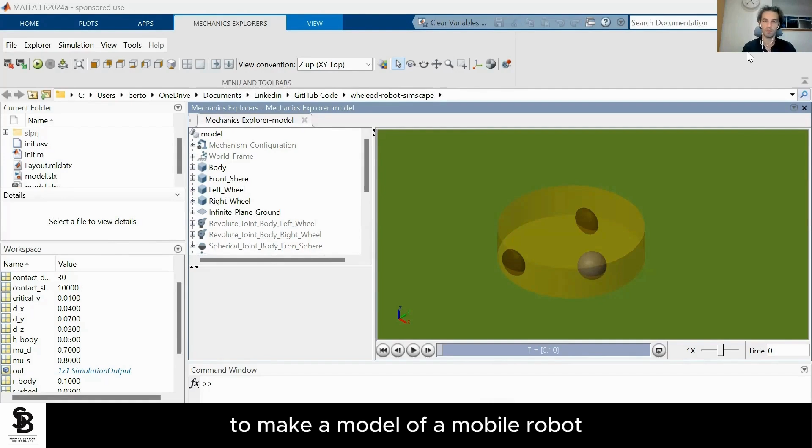I spent a few hours studying Simscape and trying to make a model of a mobile robot because I think it can be a very good and interesting platform to play around with control strategies and show some interesting things.

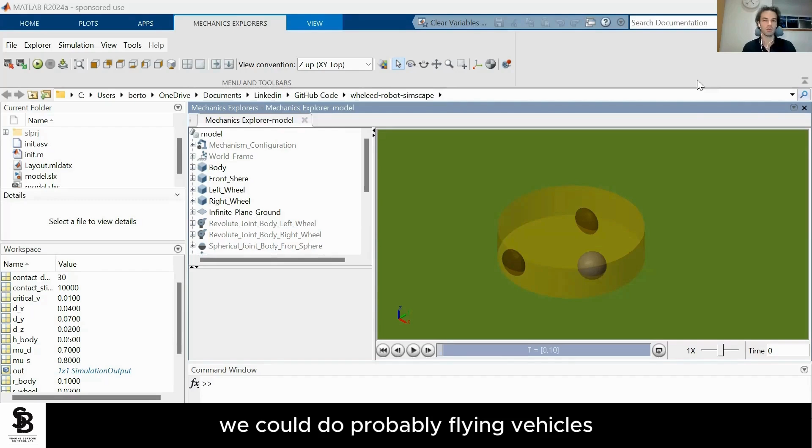And I'd really like your feedback about this. If you think this could be useful, if you think we could do something interesting with that. We could do other types of vehicles. We could probably do flying vehicles, maybe vehicles on water, underwater. I still need to learn, but I think it's interesting.

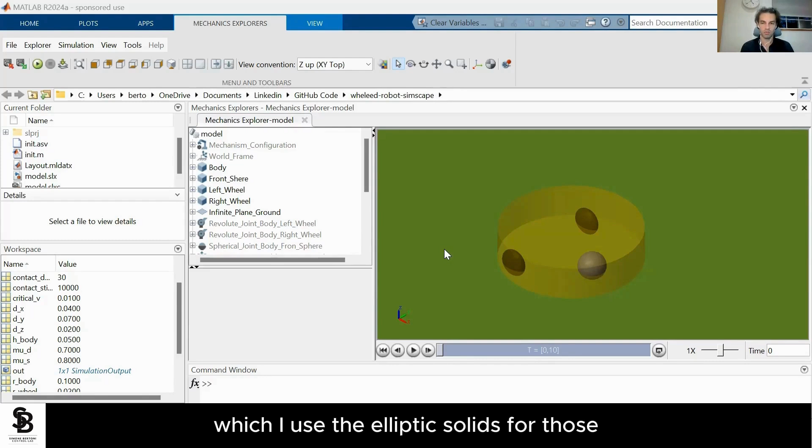So I'm starting here from the result. So you can see this is the robot, and these two are the wheels, which I used elliptic solids for, and they are actuated, so they can only spin around the horizontal axis here, like a virtual axle.

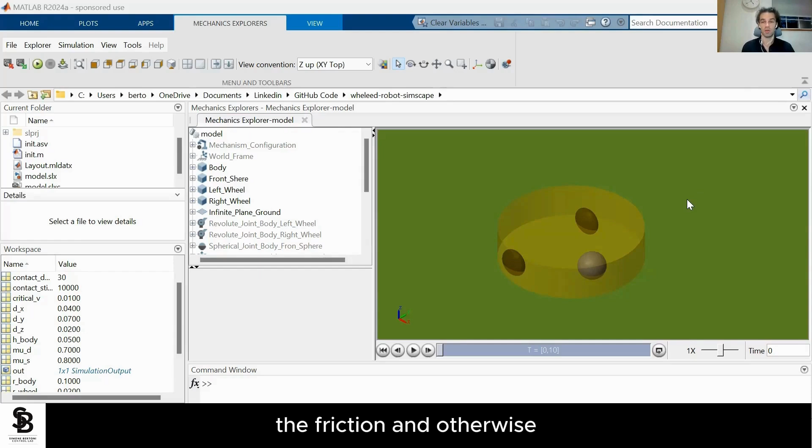And then I have a sphere on the front, which is not actuated, it's free to revolve around a spherical joint, and it's there basically to reduce the friction, otherwise we would be touching the ground with the body of the robot, which we don't want. And we can see a bit more here on what the result is. So this should be good.

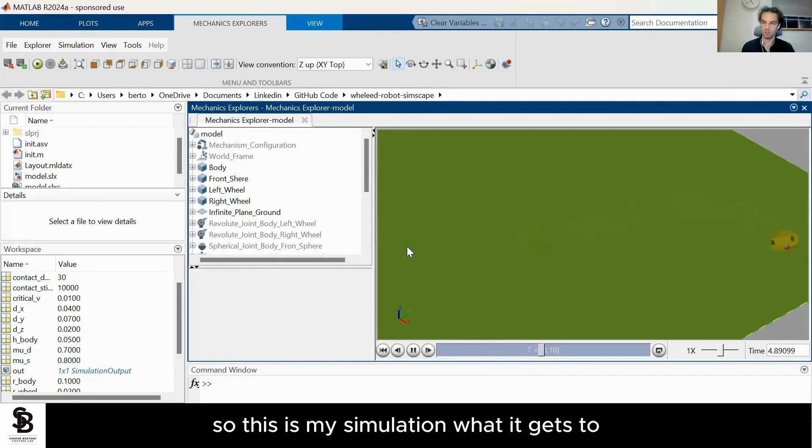Let's play the video. So this is my simulation, what it gets to. And I have no control for now here, okay? So this is all torque generated for the wheels simply by generating the torques as a profile, just to see if the model does what it's supposed to do.

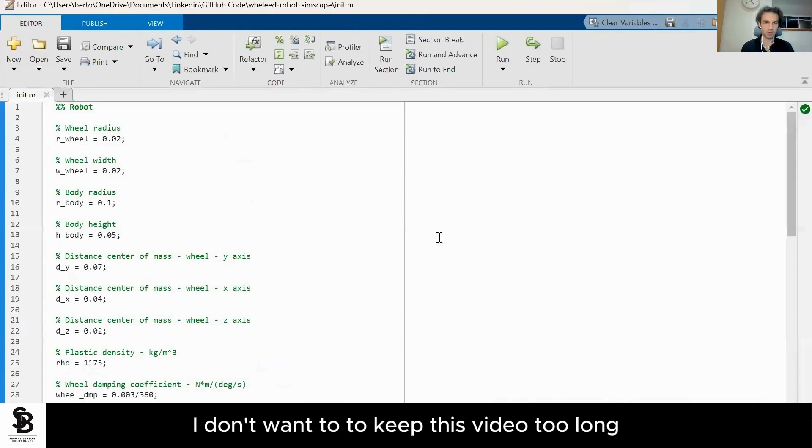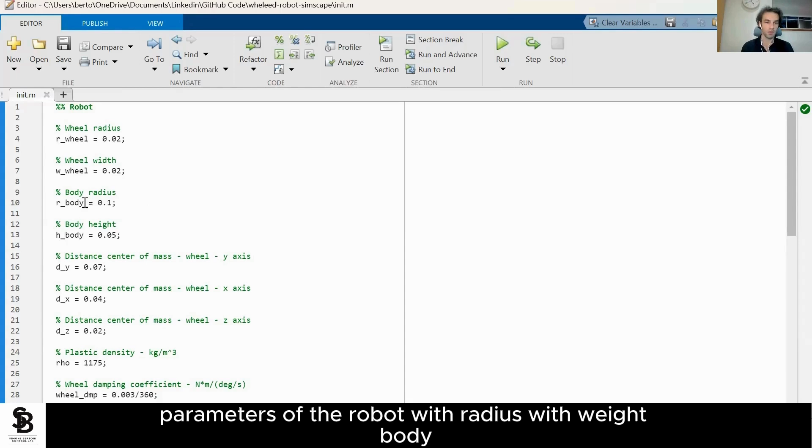Okay, let's see some configuration. I don't want to keep this video too long, so I'll try to do various videos going more into the detail later. But these are a few configuration parameters of the robot: wheel radius, wheel width, body. It's a circular robot, 10 centimeters radius. I was kind of thinking about my Hoover robot really when I put together the parameters. Okay, so there's nothing difficult there.

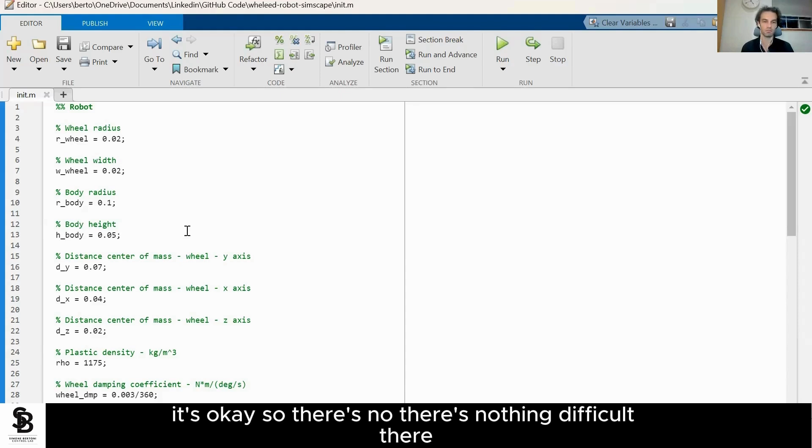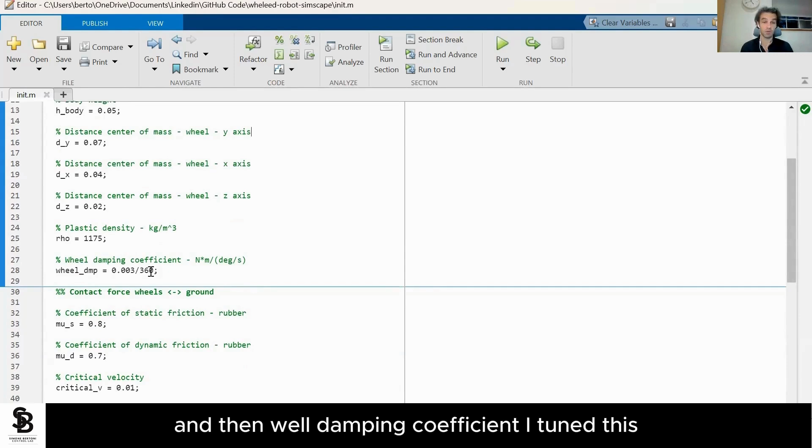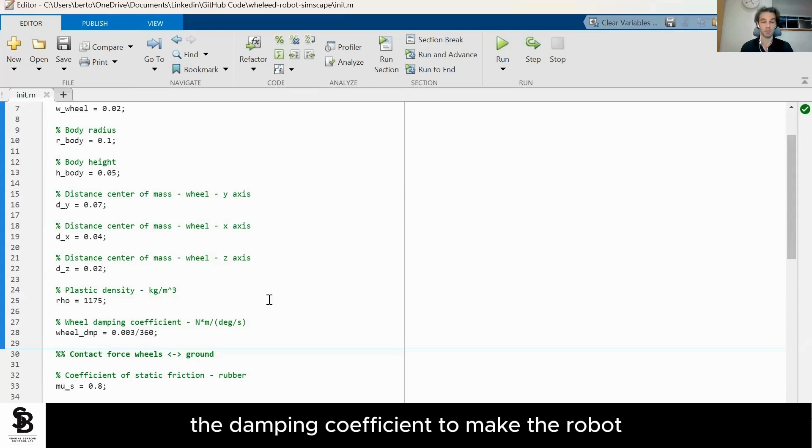Then plastic density, again, I thought it was reasonable. And then wheel damping coefficient, I tuned these. Basically, I looked at a few DC motors that are used in these cases. I picked the maximum torque that they can deliver, and then I used the damping coefficient to make the robot not exceed a reasonable speed, like half a meter per second or a meter per second, something around that. Then we have the contact force with the ground.

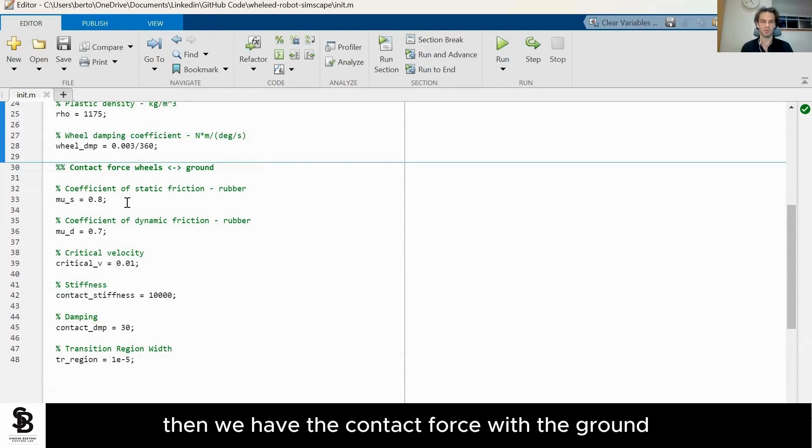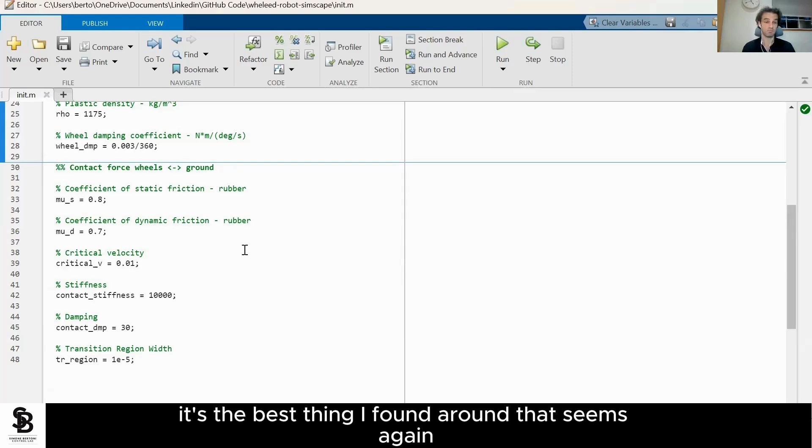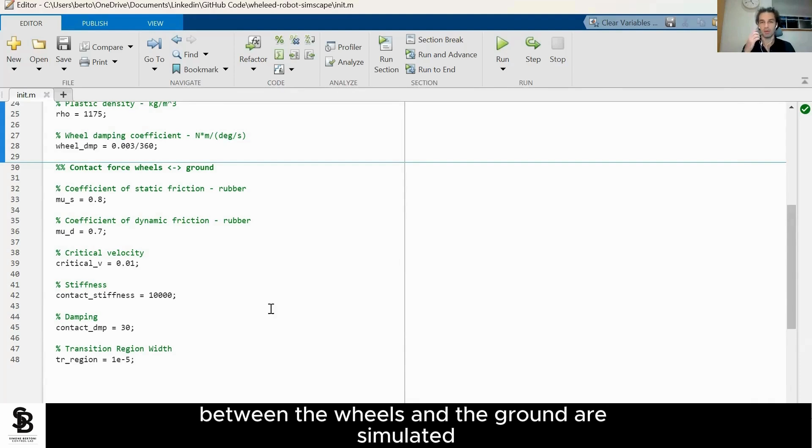So the friction, static friction and dynamic friction, I took rubber on a concrete platform. It's the best thing I found around. That seems reasonable for now. These parameters around the contact force and how the contact between the wheels and the ground is simulated are still a bit of a mystery, to be honest, for me. So I looked at other examples from MathWorks, and I hope they're good enough. They seem to replicate the behavior well.

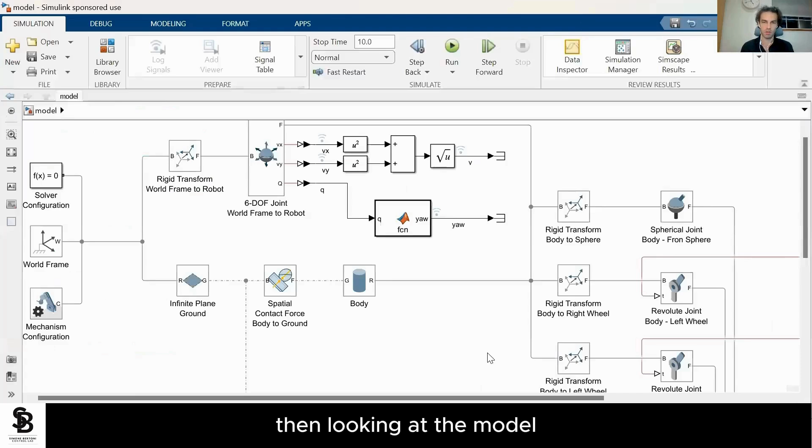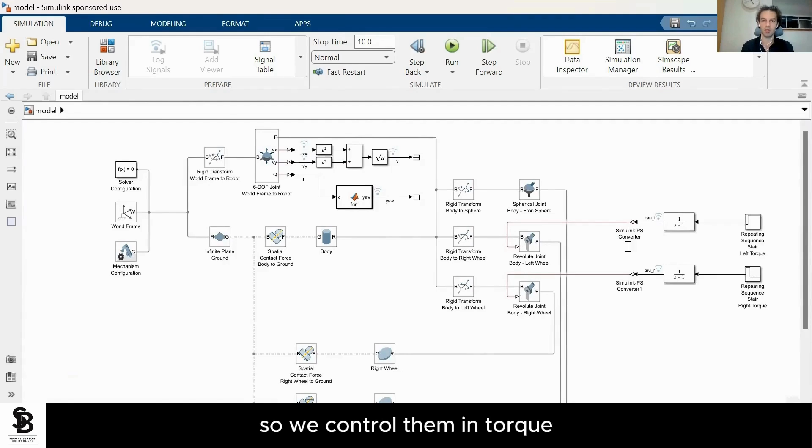Then looking at the model, I'm not going to explain the model too much because I want to do another video. But basically, the wheels are ideal. So we control them in torque, which obviously isn't right, but it's an approximation for now. Maybe going forward, we will use our DC motor model that I've done in Simscape as well. We'll see.

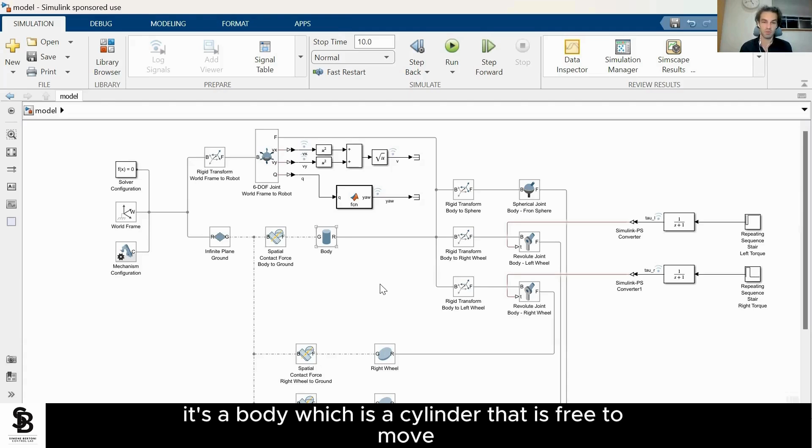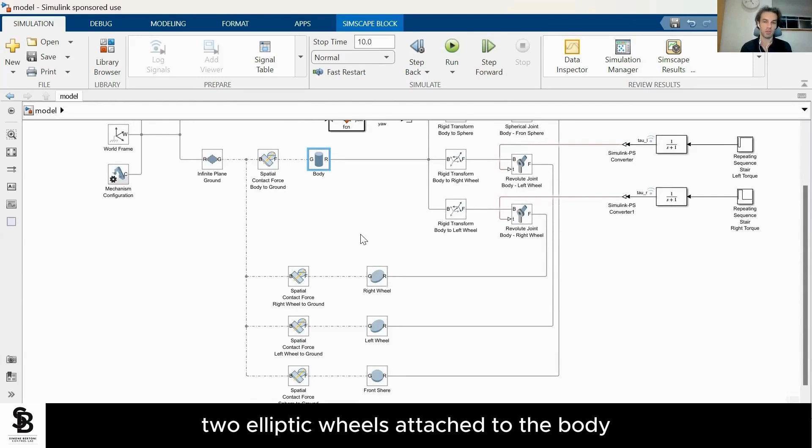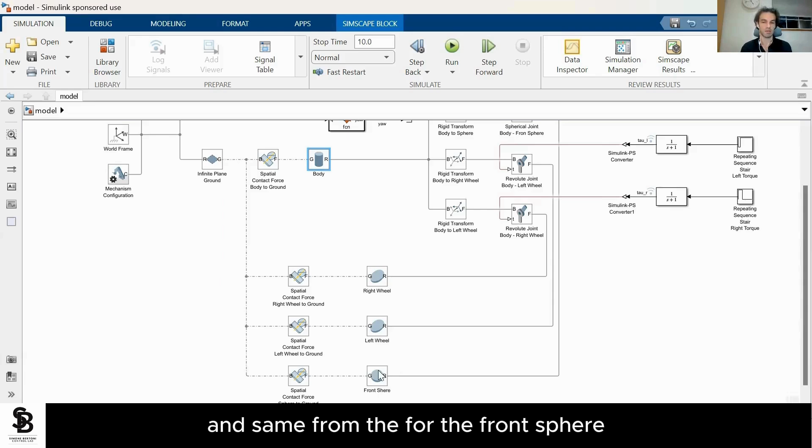And then what we have is essentially a body, which is a cylinder that is free to move with respect to the world frame. And then there are these two elliptic wheels attached to the body, which can only revolve around the horizontal axis, and they're slightly translated to place them where I think it's reasonable. And same for the front sphere.

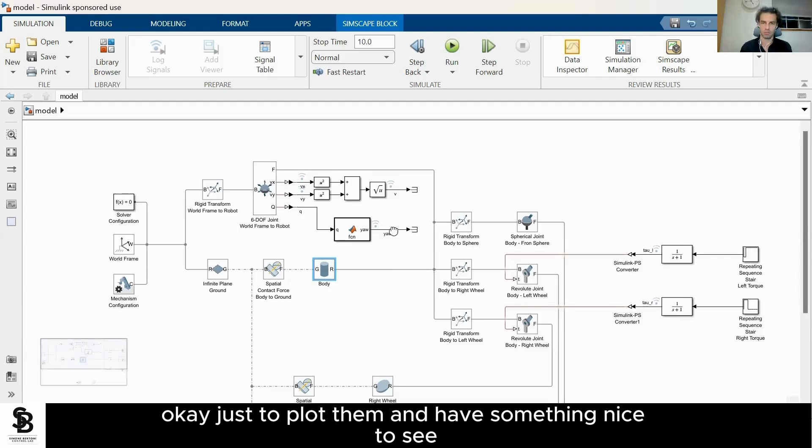And then what do we have? The joint of the robot. I've played around with it to find the speed on the ground and the heading, basically. Okay, just to plot them and have something nice to see. So let's look at the plot.

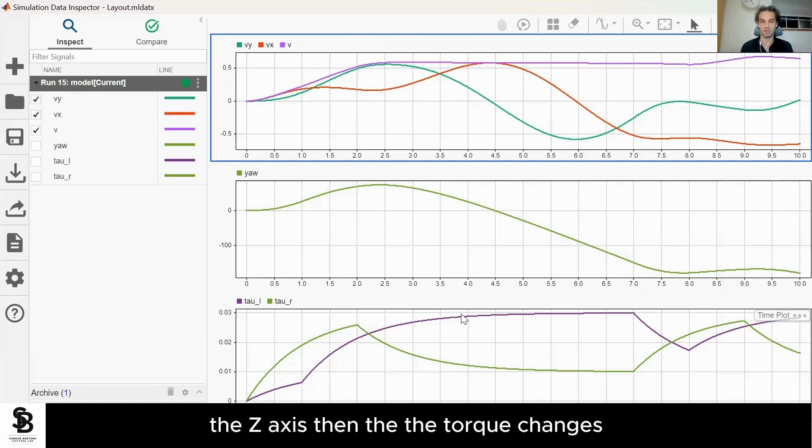This is the plot. If you remember, I'm giving more torque on the right first, so we're going left, which is positive towards the Z axis. Then the torque changes, so we're giving more torque on the left, and we go the other direction, right? So we go towards 90 degrees, more or less, and then we go towards minus 180.

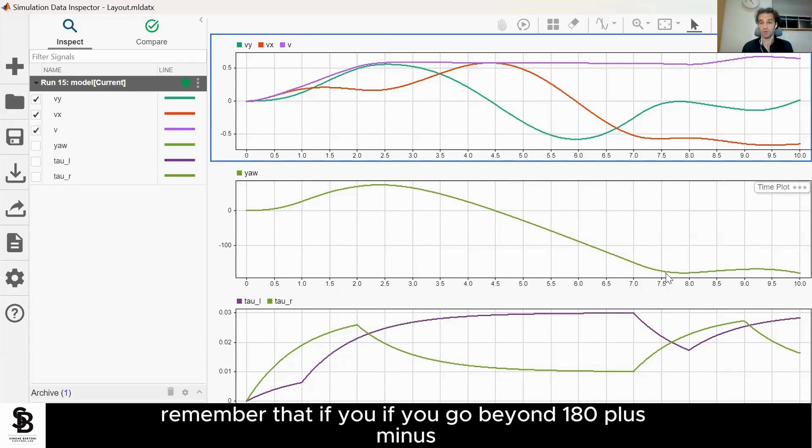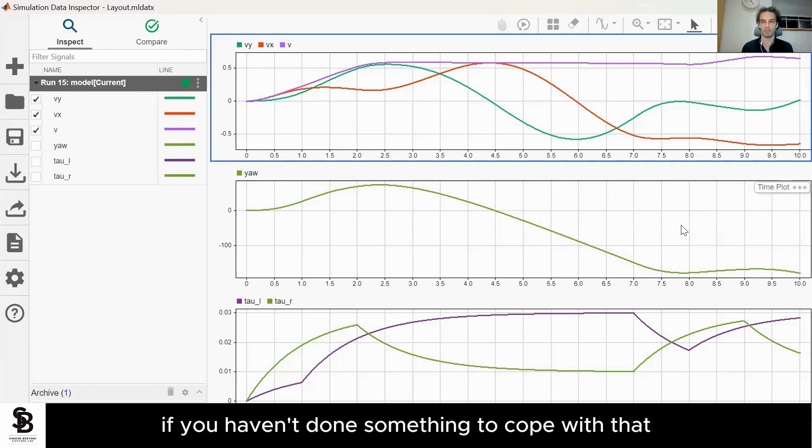This is interesting. Remember that if you go beyond plus or minus 180, for example, if you go below minus 180, your calculation will probably go to 180 and you will have a big step, which can upset your control system a lot if you haven't done something to cope with that, which we will look at if we carry on with this example. Speed increases, then it plateaus more or less around 0.5 meters per second, like I said before.

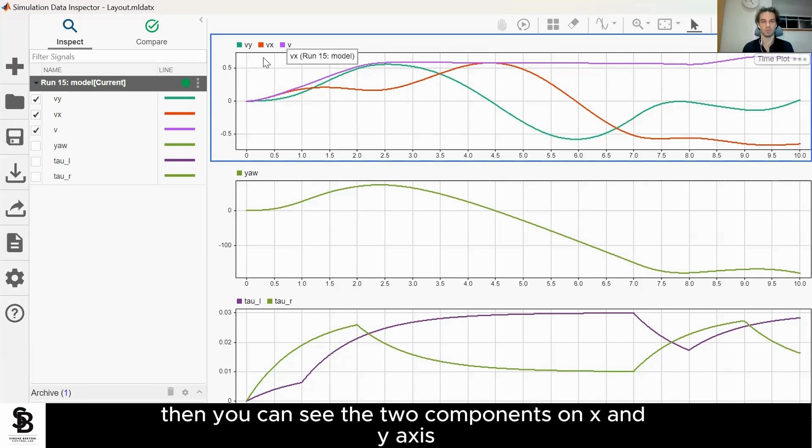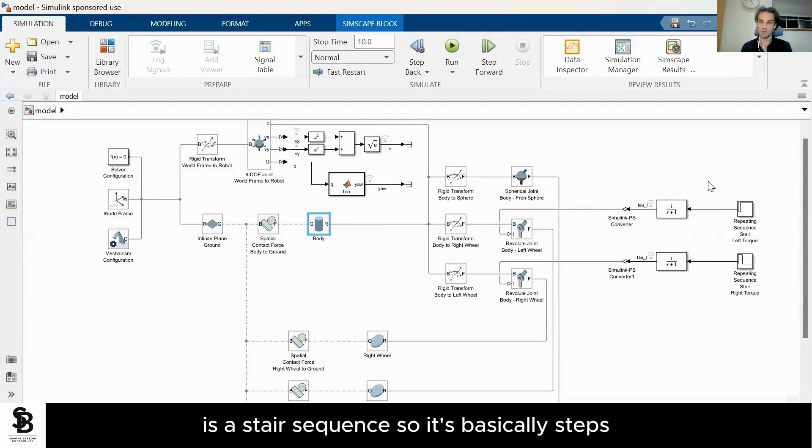Then you can see the two components on the X and Y axis. And I think that's everything really. The other thing I wanted to say is the way I generated the torques for the wheels is a stair sequence, so it's basically steps. And I found that, well, it's not really realistic anyway, but it was upsetting the simulation a bit, probably because of the contact forces. I'm still learning Simscape, really.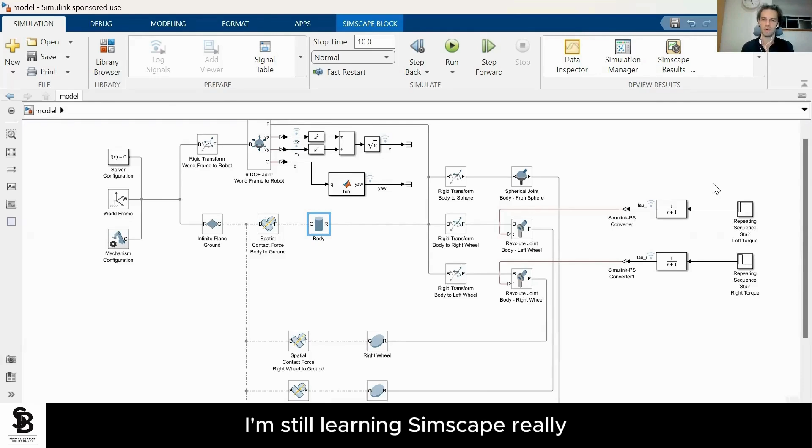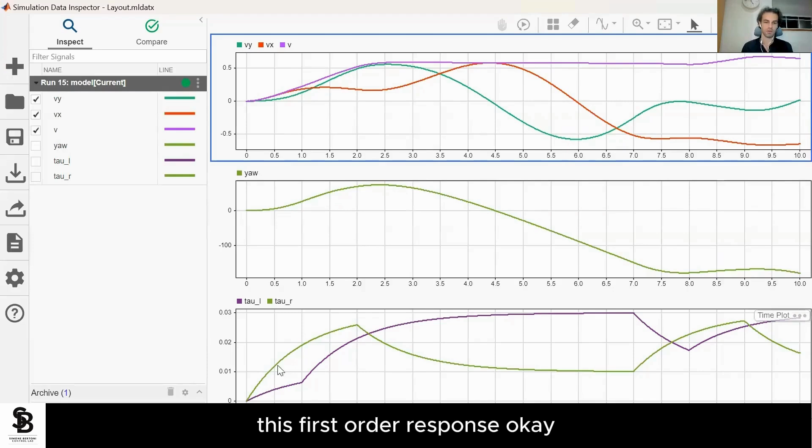So what I decided to do is I used a first-order low-pass filter downstream of the repeating sequence. So that's why you see these first order responses, okay? As I said, this is a preliminary attempt, really.